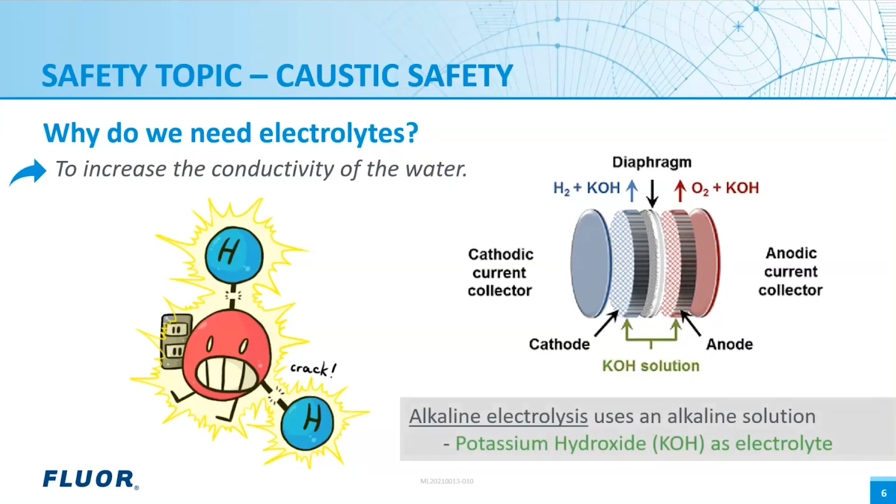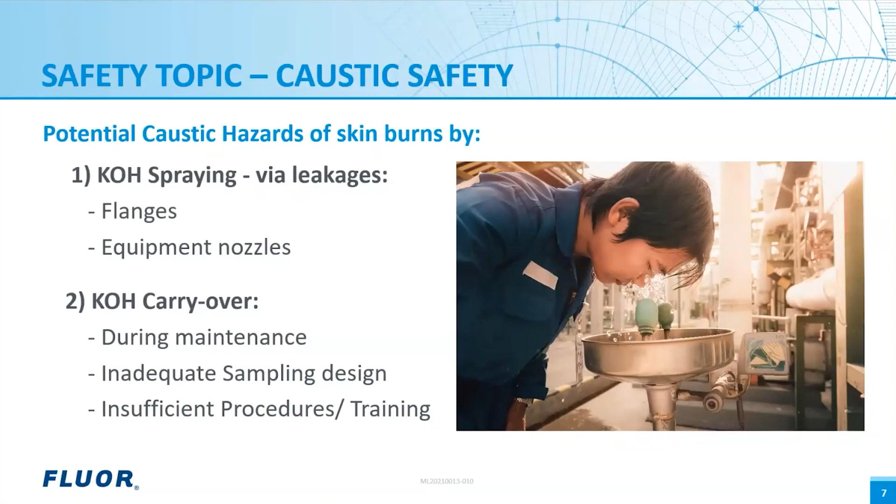I'd like to highlight some of the potential caustic hazards of skin burns, by KOH spraying via leakages from flanges and equipment nozzles. Another potential hazard is KOH carryover. This can occur during maintenance activities, inadequate sampling, and insufficient procedures and training. Caustic burns can be severe, so it requires immediate rinsing with water for at least 10 minutes and to seek medical help.

So how can we actually prevent these hazards from taking place? Some solutions are to design for maintenance, which can include easy access to equipment, adequate low point drains for proper emptying, and sufficient flush connections. We should also design for safe operation by using splash guards on flanges, having overfill protection, using level alarms, safe sampling points, safety showers with eye wash facilities, and use PPE, safety goggles, and protective clothing.

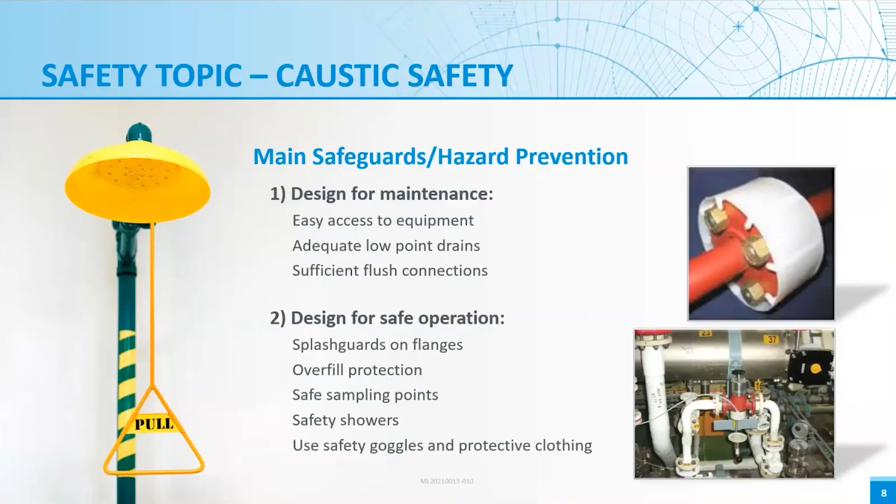Today, Javier and I are going to talk about green hydrogen, what it is, including a brief history, a look at today's market and future outlook. Then we'll get into some of the underlying electrolysis technologies, explore some of the costs, and finally look ahead to using green hydrogen at scale.

Before we get too far into what green hydrogen is, we have to ask, why green hydrogen at all? Simply put, business as usual is no longer acceptable.

This requires a radical change in the way we produce and consume energy. A multifaceted approach is required, and green hydrogen is a piece of the puzzle, especially for hard to decarbonize sectors.

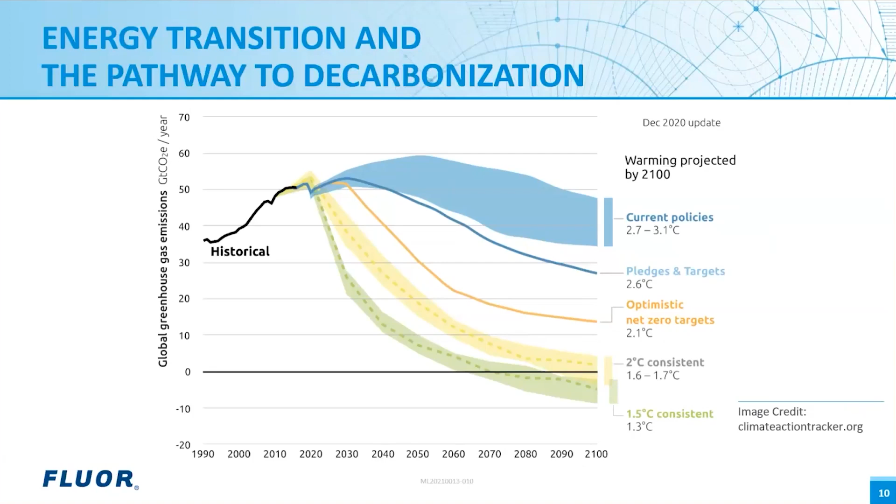While hydrogen is a colorless gas, the industry has adopted a framework of colors to describe the source of hydrogen and implicitly its carbon intensity. Most hydrogen today is produced from fossil fuels, where CO2 is emitted to the atmosphere. This is called gray hydrogen, or sometimes brown or black, depending on the type of feedstock utilized.

Blue hydrogen is also fossil-based, but utilizes carbon capture and sequestration technology to reduce total emissions. Green hydrogen most often refers to hydrogen produced by electrolysis, using renewable energy, and will be the focus of today's presentation. Hydrogen from renewable natural gas or biomass gasification is also sometimes referred to as green. Check out an upcoming Innovation Builders webinar for more information on biomass gasification.

Other colors include turquoise, pink, and even yellow, purple, or white hydrogen. By and large, though, gray, blue, and green are most commonly used.

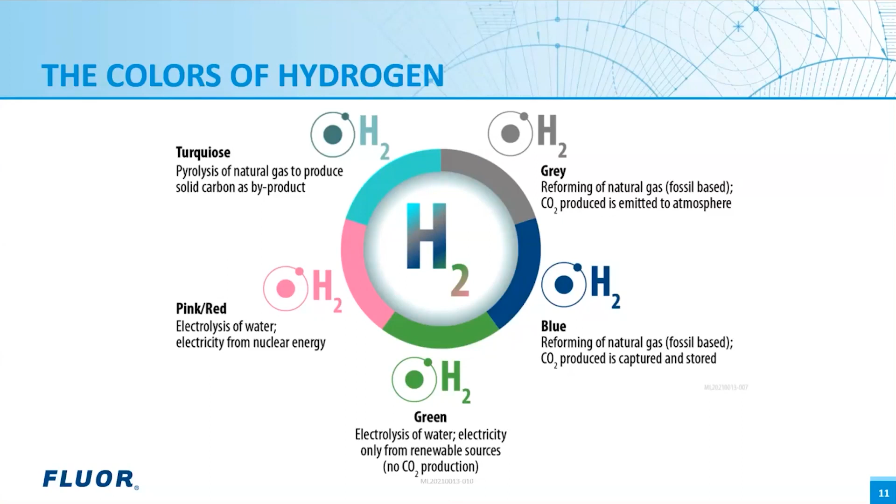Currently, the hydrogen market is a $120 billion industry. Annual global demand for pure hydrogen is approximately 75 million tons. Hydrogen mixed with other gases represents another 45 million tons of demand. Steady growth in the market has existed for several decades.

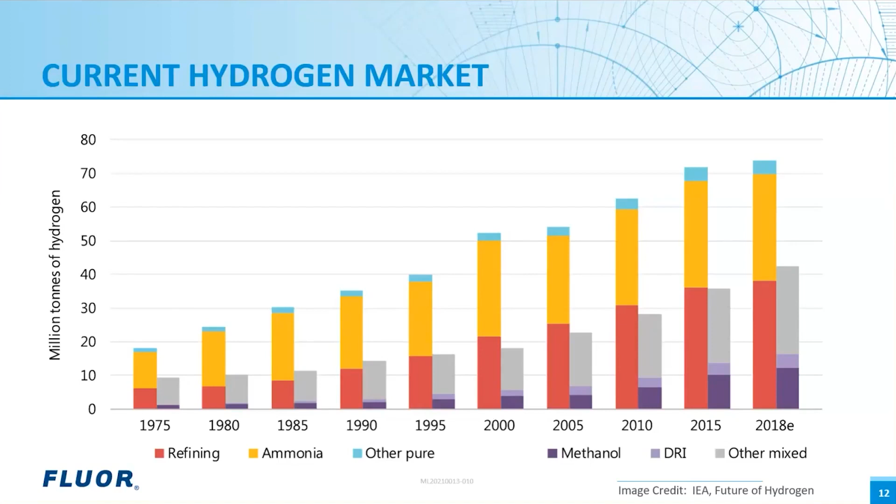Pure hydrogen growth has been driven primarily by captive users in the refining and fertilizer sectors, while hydrogen mixed with other gases has seen increased consumption for methanol production and as a byproduct fuel gas. Virtually all of this hydrogen is gray hydrogen, produced from steam reforming of natural gas or gasification of coal feedstocks.

Looking forward, production and use of gray hydrogen is expected to be displaced by a mix of blue and green hydrogen, with very little gray remaining beyond the year 2040. This is driven by hard to decarbonize sectors where it's challenging to simply decarbonize by electrification.

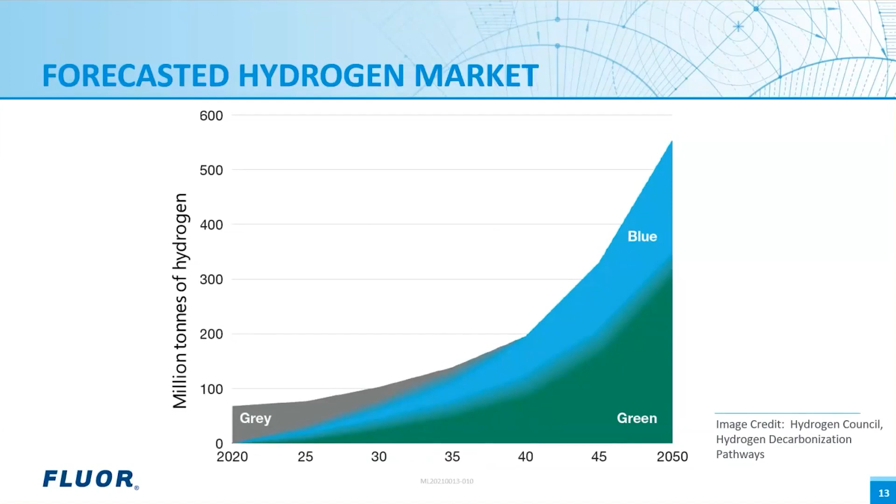Examples include existing refining and ammonia capacity, the steel industry, heavy duty and long haul shipping, aviation perhaps, seasonal power storage, and other industrial processes where CO2 can be utilized in conjunction with the produced hydrogen. The actual proportion of green versus blue hydrogen as we move towards 2050 will vary, depending on a variety of considerations, including technology cost, cost of carbon, and other regional considerations.

Now you might say, haven't I heard this before? And you'd be right. The idea of a hydrogen economy goes back to about 1970. The oil embargo in the 70s led to quite a bit of interest in alternative energy, including hydrogen. After the embargo was lifted, though, oil prices fell and interest for alternatives like hydrogen fell with it.

Then, in the 1990s, fuel cells took the spotlight, especially in the auto industry. Again, oil prices remained low and interest waned. The 2000s saw another boom and bust.

Now we are in 2021, and Wood Mackenzie has called the 2020s the decade of hydrogen. You can hardly go a day without a new project announcement around hydrogen. So what's different this time?

Certainly a strong push to limit carbon emissions from governments, industry, and individuals alike. But perhaps even more significant is the proliferation of cheap, renewable energy. Dramatic cost reductions in solar and wind are really what can turn this latest round of hype into reality.

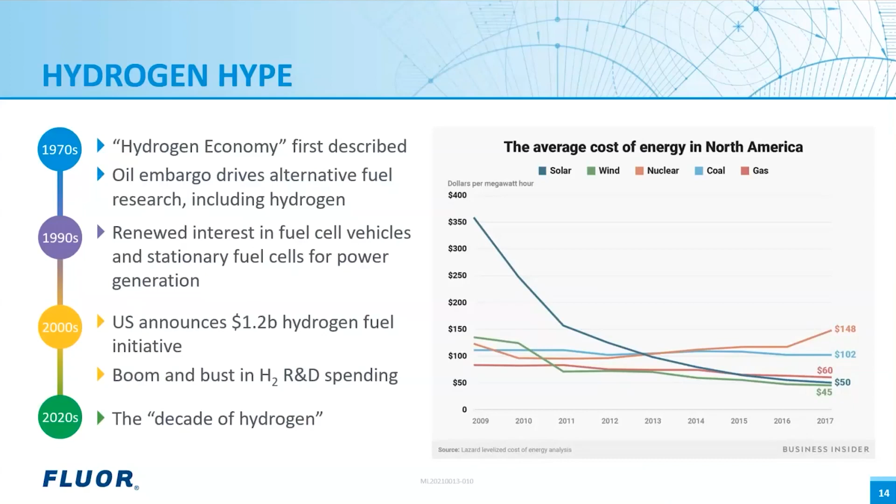As you can see from the chart, even 10 years ago, the costs of renewable energy put green hydrogen well out of reach. Today, though, wind and solar represent the majority of new electric generating capacity additions, while traditional technologies, such as coal, are seeing early plant retirements in many parts of the world.

Now that we've generally introduced green hydrogen, Javier will dive into the technology behind its production. Let's go straight into the presentation and talk about what electrolysis technology is and its long history, as well as the different types of electrolyzers available in the market.

Electrolysis is becoming more and more popular on the news. We see new announcements on a weekly basis, but electrolysis is not a new technology. It has been used for more than 100 years to perform chemical reactions using electricity as an energy source.

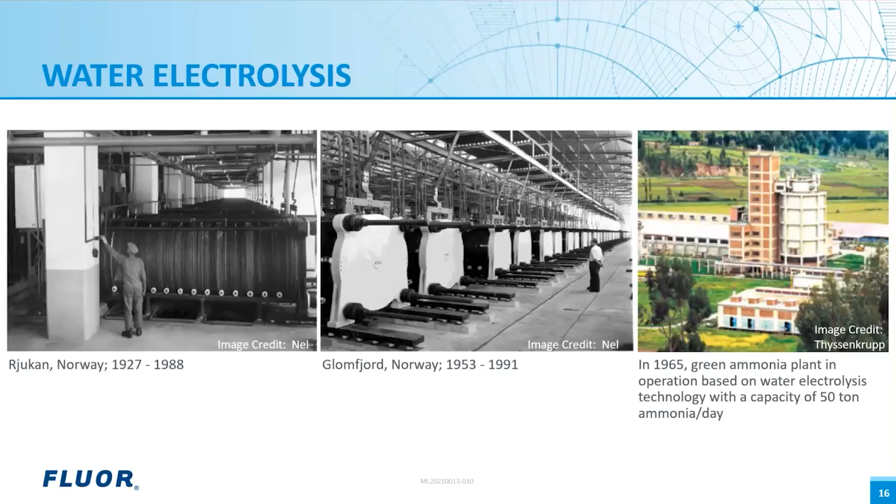Here we can see 3 examples: 2 plants producing green hydrogen in Norway that ran for 40 and 60 years, proving the strong reliability of this technology. Another example is found in Peru, producing green ammonia with a capacity of 50 tons per day, with green ammonia being one of the largest potential off-takers of new green hydrogen capacity. We can conclude that electrolysis is not a new technology, and there is plenty of experience developed over the years to ensure a successful implementation of this technology at large scale.

If there is a process where electrolysis has been widely used globally, it's in the production of chlorine, known as chlor-alkali electrolysis technology, in operation for more than 100 years with plants all over the world. This technology is the sister of alkaline water electrolysis for hydrogen production, and there are many similarities between the two, which will help speed up the implementation of water electrolysis at large scale. On the left-hand side, you can see an electrolytic membrane cell.

This technology works as follows: a high concentration solution of sodium chloride in water is fed into the electrolysis cell, and then by applying a current, sodium chloride is split into chlorine, hydrogen, and sodium hydroxide.

Here we can see an example of a chlorine plant in the UK producing roughly 400 kilotons of chlorine a year, which is equivalent to 125 megawatt capacity. Fluor has executed chlor-alkali plants across the globe, and this plant is one of them.

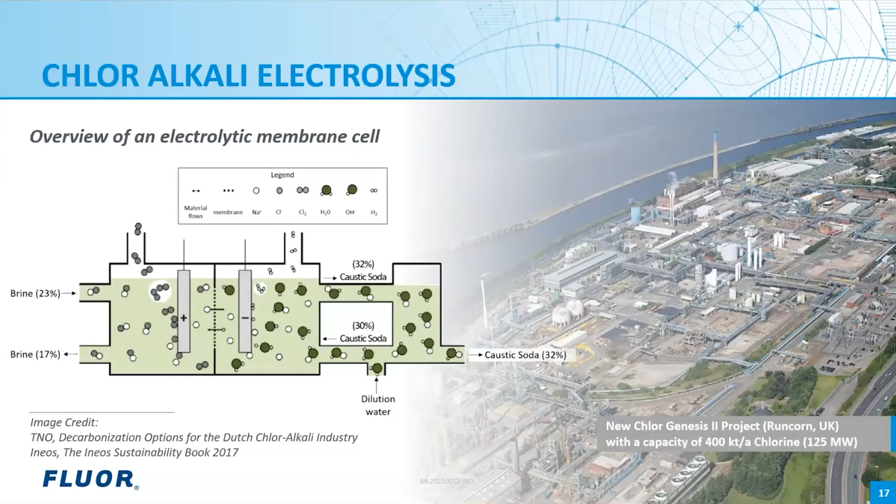Now let's figure out how we can produce hydrogen using water electrolysis technology. In this diagram, you can identify the main elements of a water electrolysis plant, including the power generation from wind, solar, or other renewable sources, as well as the electrical equipment required to get the power at the right conditions for the electrolyzer cells. Then we have the feed water supply, which is the main raw material together with electricity.

Ultra-pure demineralized water quality is required to run the electrolysis unit, with preferred electrical conductivity of 1 microsiemens per centimeter. Alkaline technology can handle water with higher conductivity values, up to 5 microsiemens per centimeter, compared to proton exchange membrane technology that has more stringent water quality requirements of 0.1 microsiemens per centimeter.

Here we have the electrolyzer stack. This is the heart of the plant, where the reaction takes place splitting water into hydrogen and oxygen. Let's take a moment to understand what the term stack means: a stack is a combination of multiple cells, like the one we have seen for chlor-alkali technology, all placed together in series within a frame.

On the right-hand side, we see an example of a stack for proton exchange membrane technology. The top image shows two cells, each composed of a membrane and two electrodes. We also find a bipolar plate in combination with a porous transport layer used to separate each of the cells. At the ends, we have the end plates, which are important to avoid leakage and collect the outgoing fluids. The bottom image displays two stacks for proton exchange membrane technology from the British company ITM Power.

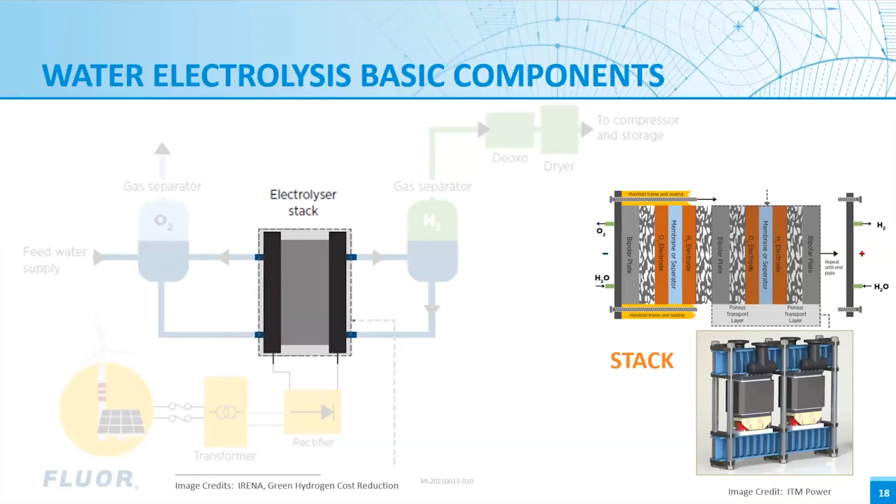Back to the main process, we have the downstream equipment required to produce hydrogen at very high purities of 99.99%. As part of the purification section, there is a separation step to remove the condensate formed after the hydrogen stream is cooled down, which is then followed by a deoxidation step to remove oxygen contaminants, and a final drying step to remove the free water still present in the hydrogen stream.

Additionally, depending on the type of technology, you might need a compression step to get the hydrogen to the right supply pressure.

There are four main electrolysis technologies, all similar in some ways, but unique in others. Each has an anode and cathode separated by a membrane or diaphragm. The overall chemical reaction is the same, but different ions participate in the half reactions occurring at the anode and the cathode. Alkaline has the longest history of industrial operation, while proton exchange membrane is a newer alternative.

Both of these technologies, though, have sufficient operating experience to be considered mature and reliable options. Solid oxide and anion exchange membrane technologies are much newer options, with limited commercial experience. As such, these are still considered developing technologies. Next, we'll take a little deeper look at each of these.

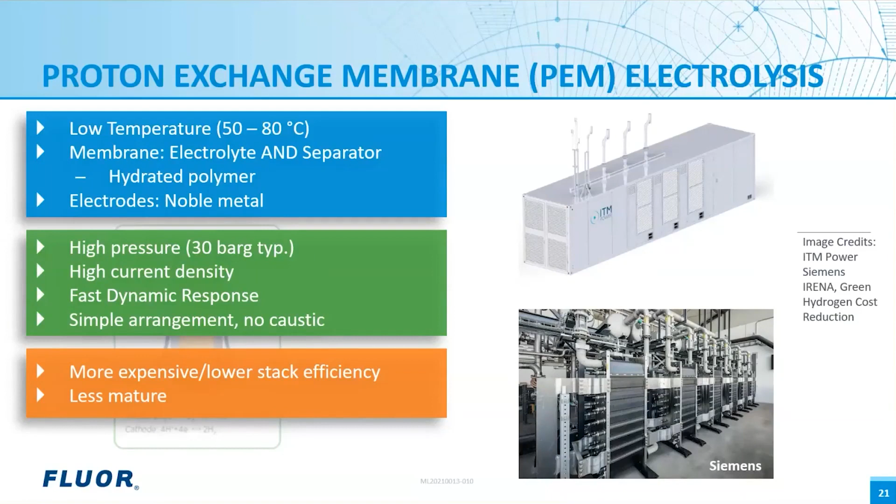Additionally, while PEM is a commercial technology with a long history, there is less experience than alkaline and its related forerunners. In contrast to alkaline and PEM technologies, solid oxide electrolysis, or SOEC, operates at very high temperature.

For this reason, it is sometimes referred to as high-temperature steam electrolysis. Similar to PEM, there's no electrolyte solution. The membrane is a ceramic oxide and acts as both the electrolyte and the gas separator. Here, oxygen ions migrate across the membrane.

The electrodes are typically a metal ceramic material for the hydrogen side and a perovskite type, such as lanthanum, strontium, cobalt, ferrite for the oxygen side. The thermodynamics of water electrolysis allows for lower electrical input at higher temperature. This leads to high efficiency. A portion of the reaction energy can be supplied thermally rather than electrically, making it a good fit for use in industrial applications with waste heat.

Solid oxide electrolysis cells have another interesting and unique feature. These systems can also electrolyze carbon dioxide to produce carbon monoxide, or electrolyze carbon dioxide and water together to produce syngas. This has some important implications as we look for ways to utilize CO2 captured from existing processes and think about how a circular economy might work.

Like many things though, while high temperature opens some doors, it creates its own challenges when we look at things like thermal cycling of the unit. Most importantly though, is that there's limited commercial experience. We expect the next 10 years to be an exciting time for this technology as it transitions from the demonstration level into full commercial status.

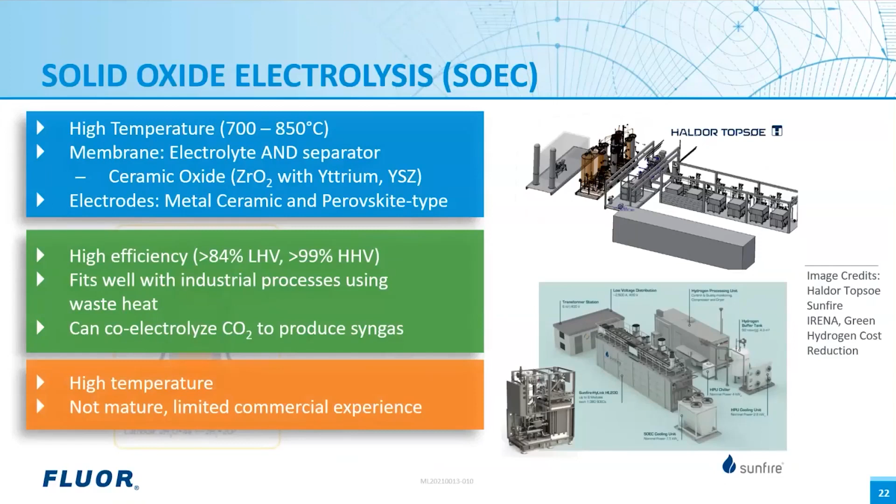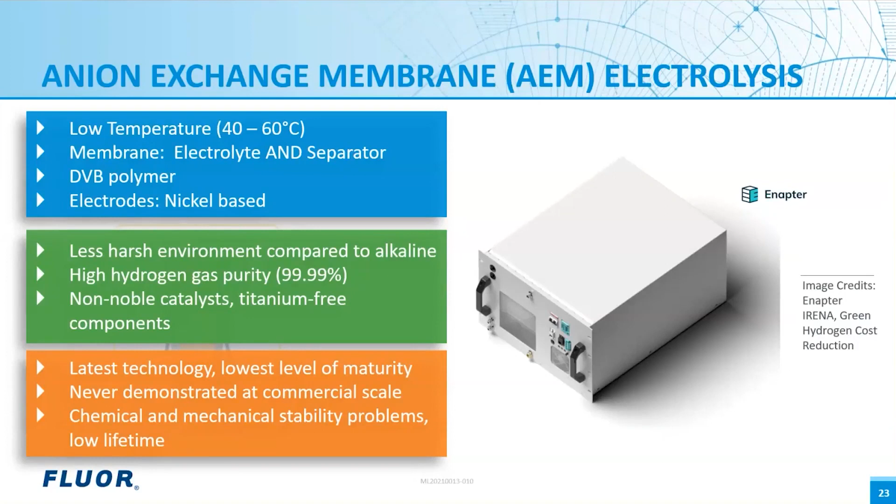Now we will discuss the current global electrolysis capacity, what the expected capacity might be for the future, and the cost involved in producing green hydrogen.

Let's talk about how the electrolysis capacity has evolved over the last 10 years and what the expected increase in capacity looks like in the coming 10 years. Although we see announcements of hundreds of megawatts or even gigawatt scale plants, like the one in NEOM in Saudi Arabia, we should be aware that the current global electrolysis capacity is rather limited, with over 110 megawatts having 60% of that capacity installed in Europe.

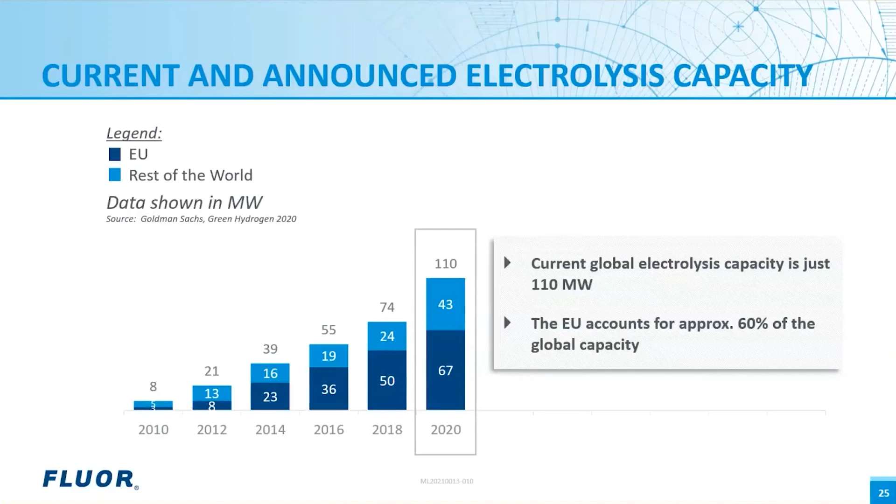If we look forward at the expected capacity increase in the coming 10 years, the picture is totally different. Goldman Sachs estimates that the installed capacity by 2030 will be 33 gigawatts, and that is only accounting for the announced projects by summer 2020. How many new projects will soon be announced, especially considering that the European Union green hydrogen target is 40 gigawatts by 2030? We don't know for sure, but something we certainly know is that green hydrogen capacity is going to increase drastically in this decade.

To give the audience a concrete figure, 33 gigawatts of capacity is equivalent to producing 5 million tons of hydrogen, which is about 7% of the current global pure hydrogen capacity.

Let's now try to understand the cost of green hydrogen. Probably this is one of the most discussed topics when thinking about green hydrogen, and that is the production cost. In the next 2 slides, I will discuss the CAPEX and the OPEX elements of green hydrogen facilities.

When we compare the electrolysis system CAPEX, there are certainly 3 figures accepted in the industry: $750 per kilowatt of electrolysis capacity for alkaline technology, $1,000 per kilowatt for PEM technology, and $2,800 per kilowatt for solid oxide technology. There is no significant difference between alkaline and PEM, but we can conclude that alkaline is more cost-effective than PEM for large-scale facilities. Solid oxide technology is simply too costly now for large-scale installations.

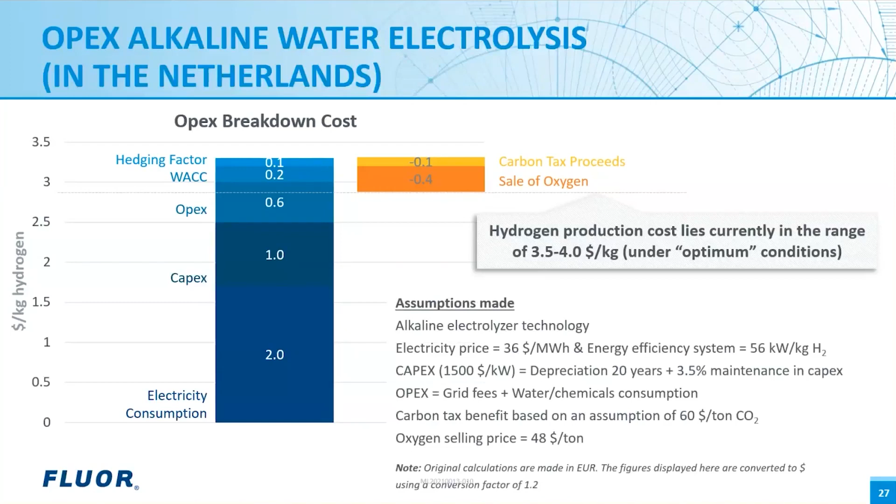Here, I wanted to show you the assumptions made in our model, highlighting the most important, the electricity price of $36 per megawatt hour. Here, there is a lot to discuss. For example, what is the optimum operating time of an electrolysis plant to get the cheapest hydrogen production cost? Because wind and sun are not always available. There are some studies claiming that the optimum is found around 4,000 hours a year, using electricity when it can be purchased at the lowest price.

Now that we understand the different cost elements involved in green hydrogen production, let's take a quick look at the projections published by two well-known organizations, the Hydrogen Council and Goldman Sachs. The Hydrogen Council expects that green hydrogen will catch up with gray hydrogen first, potentially somewhere between 2030 and 2035, driven by the increase in CO2 carbon tax, driving the gray hydrogen production cost up over time. Then green hydrogen will catch up with blue hydrogen by 2050, if we consider the worst-case scenario.

Goldman Sachs estimates that green hydrogen will only catch up with blue hydrogen at normalized gas prices, an average of gas prices over time, not at current low gas prices. This will only happen by 2050 if green hydrogen is produced using solar power, currently the cheapest source of electricity. The purpose of this slide is to show that there are many reports out there, and the outcome always differs depending on the assumptions made.

These values are not set in stone. They are estimations, and only time will tell when green hydrogen will become cost competitive with gray and blue hydrogen.

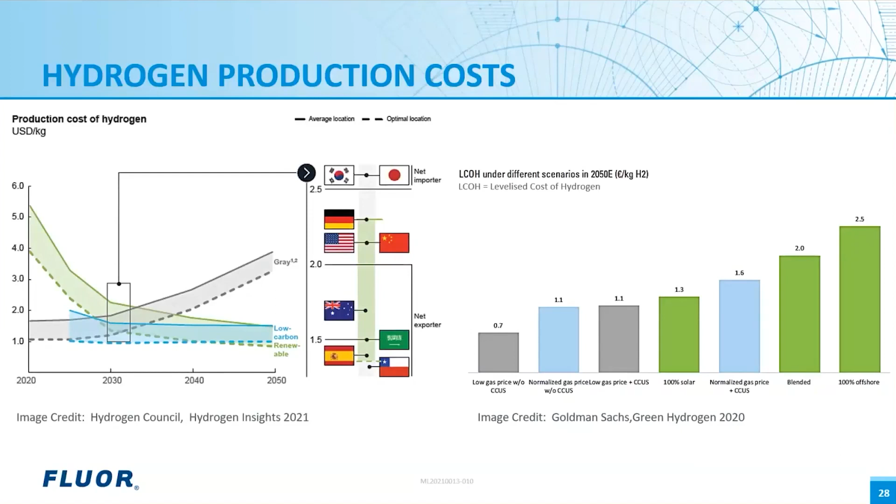We wanted to talk about the main aspects to consider when building large-scale electrolysis plants, the available options to store and transport hydrogen, using nuclear power to fuel electrolyzers, and some interesting projects happening within Fluor.

The first one is location. Will it be a new facility or integrating within an existing one? Will the plant be close to the renewable power generation or close to the hydrogen off-takers to reduce transportation costs? If a constant supply of hydrogen is required downstream, is there availability of existing hydrogen backup, either by gray or blue hydrogen?

The second one is power generation. Will the power be generated from solar, wind, hydro, nuclear, or potentially a hybrid system? By nature, wind and solar power generation is intermittent, and typically operating hours lie in the range of 3,000 to 5,000 hours for plants connected directly to wind or solar farms. Will the plant be connected to the grid, not always knowing if the power comes from renewable sources? Or will it be connected directly to a wind or solar farm, only operating when the wind is blowing or the sun is shining?

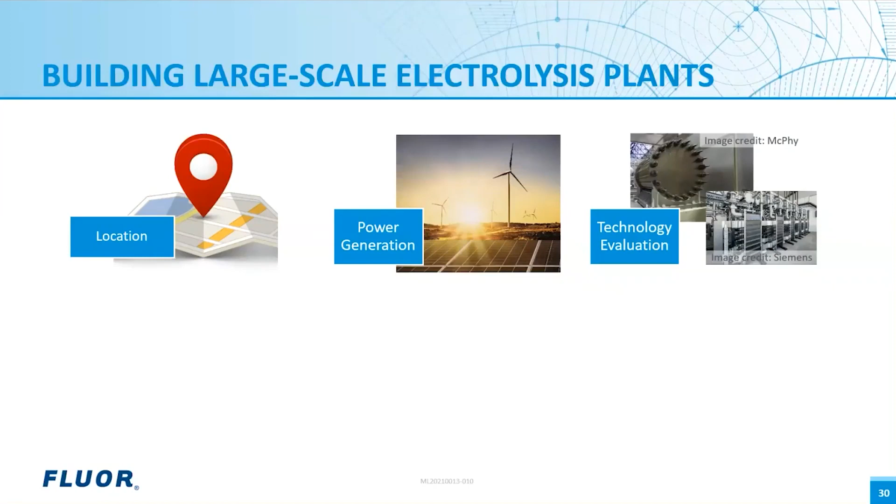The third one is technology evaluation. Here we need to consider factors such as technology cost, project financing, and how to reduce risk for funding, perhaps creating strategic partnerships to make the project bankable. Other aspects are technology performance in terms of maturity, reliability, and energy efficiency, as well as the plot space required, the lifetime of the stack, how often it needs to be replaced, and other maintenance requirements to run the plant.

The fourth consideration is the hydrogen itself. Will it be used locally, or exported elsewhere? Will it be sold as such, or further converted into ammonia, methanol, or other fuels? If hydrogen needs to be transported, which of the multiple available options will be considered? I will briefly discuss this topic in the next slide.

The fifth one is plant design. Will the plant be built as a standardized design, or does it need to be customized, for example to operate at higher pressure? Last but not least, this technology requires large amounts of water, so water availability needs to be assessed. Is there a good quality water source available nearby, or is a desalination plant required to get sufficient water?

These are the six considerations to be carefully evaluated at an early stage when building large-scale electrolysis facilities.

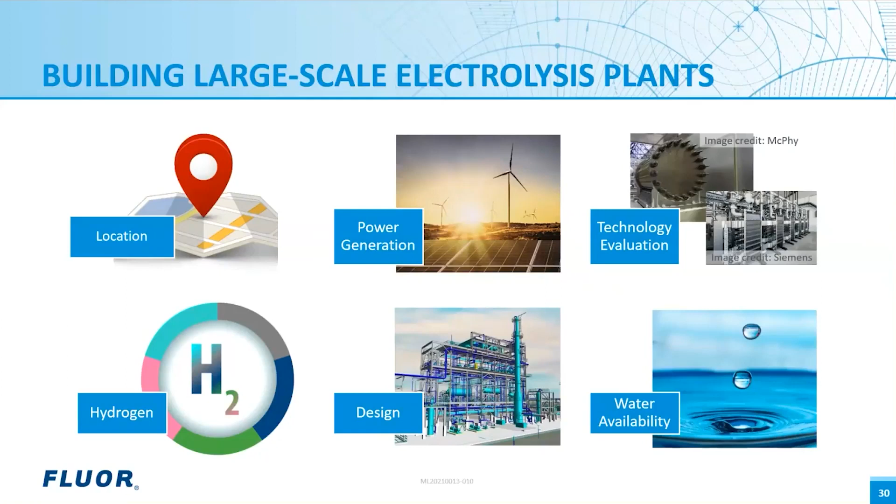In this presentation, we also wanted to touch on hydrogen storage and transport, although this could be a topic for a separate webinar by itself. When transporting or storing hydrogen, there are a number of possibilities to be evaluated. Here I will briefly mention the different options.

We can transport hydrogen using existing gas pipelines with minor modifications. There are many studies currently looking at this. The main conclusion is that hydrogen can be blended with natural gas in existing pipelines, up to 15 to 20 volume percentage, easily helping to reduce carbon emissions. Above that threshold, major modifications are required.

We can store hydrogen as liquid hydrogen at cryogenic conditions, minus 253 degrees C. We can also store hydrogen as compressed gas in the range of 200 up to 700 bar.

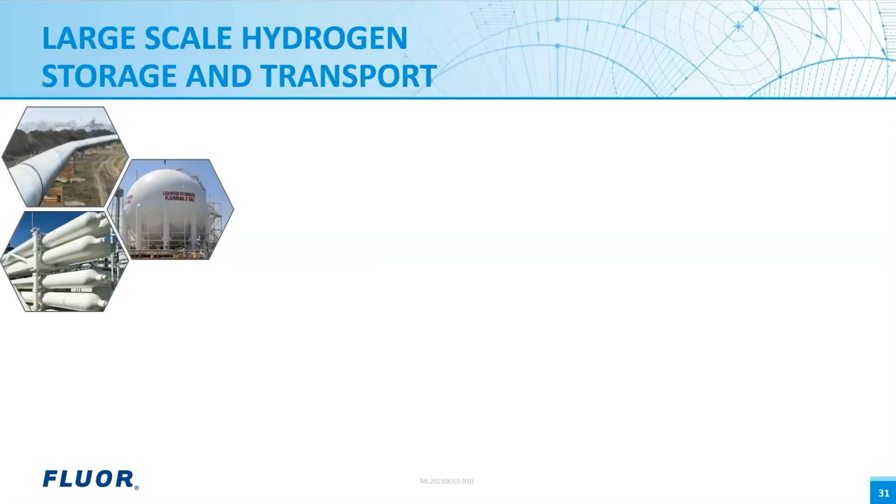Here are more options. We can store and transport hydrogen as part of an organic molecule, known as liquid organic hydrogen carrier. Basically, an organic molecule is hydrogenated at the hydrogen production site. Then the hydrogenated molecule, in liquid form, is transported using existing gasoline or diesel infrastructure. Finally, the molecule is dehydrogenated at the hydrogen off-taker site, sending the liquid organic carrier back to the hydrogenation facility. We can follow a similar approach by producing methanol or ammonia.

Salt caverns can also be used to store hydrogen, with many studies currently investigating this concept.

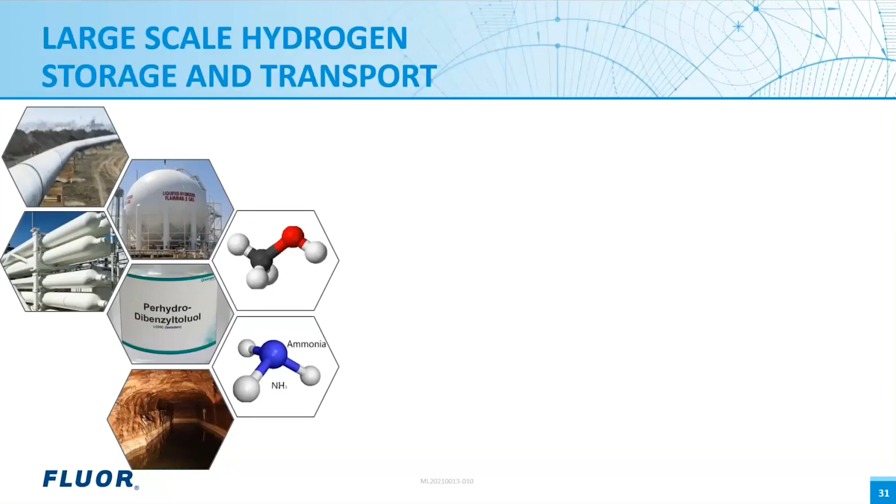Producing green hydrogen via electrolysis will take an enormous amount of clean power. To replace current pure hydrogen demand of approximately 75 million tons per year, without consideration for emerging markets or growth, requires an annual power input on par with the total annual power demand for all of Europe. This is roughly 2,200 gigawatts of solar PV capacity or 1,300 gigawatts of wind. As perspective, the current global operating capacity for solar PV and wind are each around 750 gigawatts. Looking ahead to 2050, with potential hydrogen demands over 500 million tons per year, the power requirements are now on the scale of the annual global power consumption we have today.

While solar and wind additions are robust and will play a major role in the energy transition, there are still some fundamental challenges that remain. Low capacity factors necessitate large installed electrical generation capacity, but also increase the installed electrolysis capacity required, unless battery storage is used to level out the renewable generation. Considering these things, proponents of nuclear energy see a natural fit with hydrogen, even more so if high-temperature steam electrolysis technologies such as solid oxide are successfully deployed. And while nuclear-based hydrogen has claimed pink as its hydrogen color of choice, from a carbon intensity perspective, we are really still talking about green hydrogen. With this approach, a base load of large-scale hydrogen could be produced with a fraction of the land usage.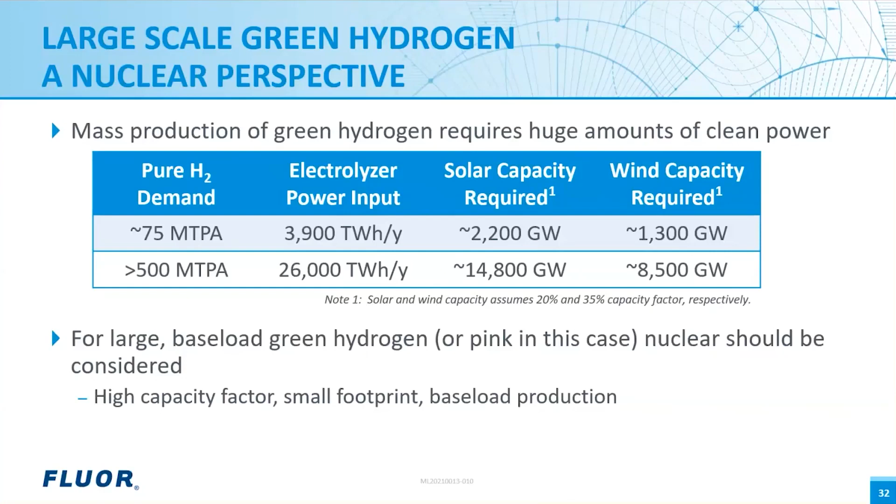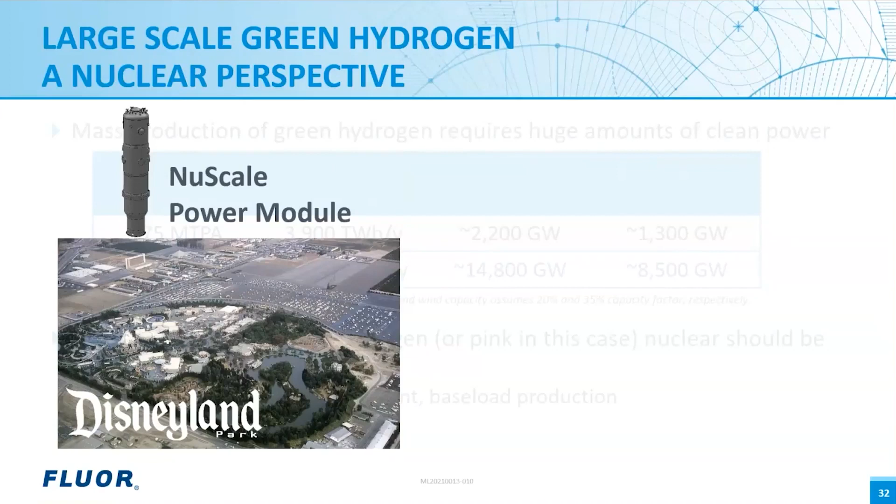Studies on the NuScale small modular nuclear reactor being developed by Fluor indicate required land use is close to 500 times less compared to solar PV. Putting it into perspective, a nominally 1,000 megawatt NuScale facility would fit comfortably on the Disneyland Park property located near Los Angeles in the city of Anaheim. Meanwhile, considering the low capacity factor and its distributed nature, a solar-based system producing the same amount of hydrogen would need to cover the entire city of Anaheim.

Shifting gears from very large to very small, I wanted to highlight an exciting demonstration project Fluor is involved in. California has long been a leader when it comes to clean energy, including green hydrogen. In addition to the growing network of hydrogen fueling stations in the state, we see industry stepping forward as well. SoCalGas is the United States' largest natural gas distribution utility and has committed to net zero emissions in operations and delivery of energy by 2045.

Fluor is supporting SoCalGas on multiple fronts. One of these projects is called the H2 Hydrogen Home, which will showcase the role hydrogen must play in attaining California's goal of carbon neutrality. The project will include solar panels, an electrolyzer, a battery energy storage system, hydrogen storage, and a hydrogen fuel cell integrated together into a microgrid for the home. The demonstration will convert solar energy into clean hydrogen, which can be stored, blended into the natural gas supply, and used in the fuel cell for the home's electricity use. Any excess energy will then be exported to an existing SoCalGas commercial facility, further offsetting grid power.

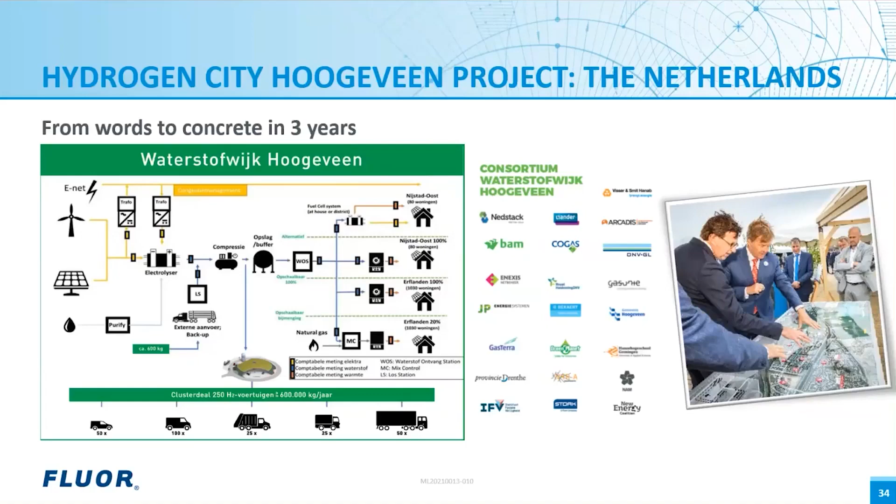Hydrogen is important and will play a key role in hard to decarbonize sectors, such as heavy-duty transportation or high-temperature operation in industry. Electrolysis is not a new technology, but its application for on-purpose hydrogen production and gigawatt-scale implementation is new.

Electrolysis capacity will expand rapidly over this decade, from 100 plus megawatt to many gigawatt by 2030. Alkaline generally shows the lowest CAPEX and OPEX, especially for large baseload plants, but PEM technology is not far behind, and it has its own advantages.

Whether large or small scale, Fluor has the right skill set to manage and implement not only water electrolysis plants, but also hydrogen logistics, infrastructure, and compression stations in greenfield or brownfield applications.

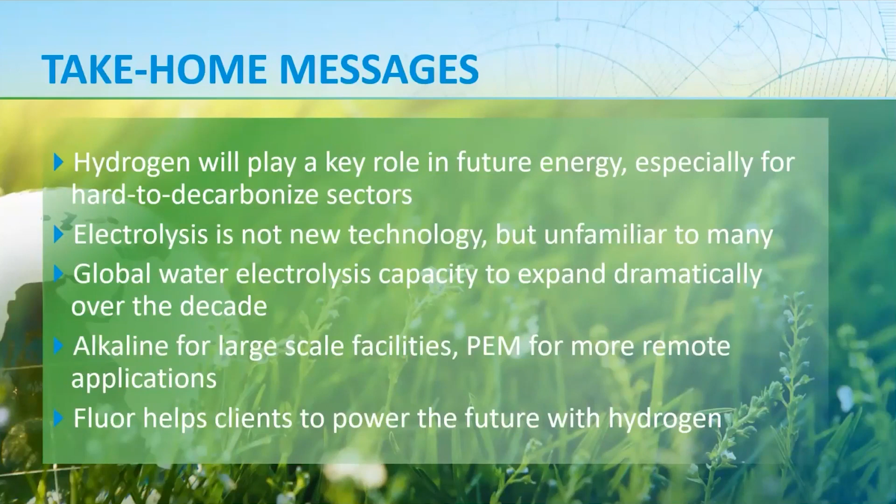The first question is, can the lack of availability of water be a problem in the future? And what quality of water is needed?

Yeah, I will take that question. So, indeed, studying the availability of a water source nearby is extremely important, although building pipelines to transport water is relatively cheap. And for running water electrolysis plants, you need ultra pure demineralized water quality. This is very important to avoid the elements of the stack deteriorating too fast. Depending on the type of water you have, if you have tap water, you will need a pretreatment step such as ion exchange, also known as electrodeionization. And if you have seawater nearby, you will need a different type of pretreatment, such as reverse osmosis, to ensure that the electrical conductivity of the water is in the range of 1 microsiemens per centimeter for alkaline technology. And for PEM technology, you will need to go even deeper, to 0.1 microsiemens per centimeter.

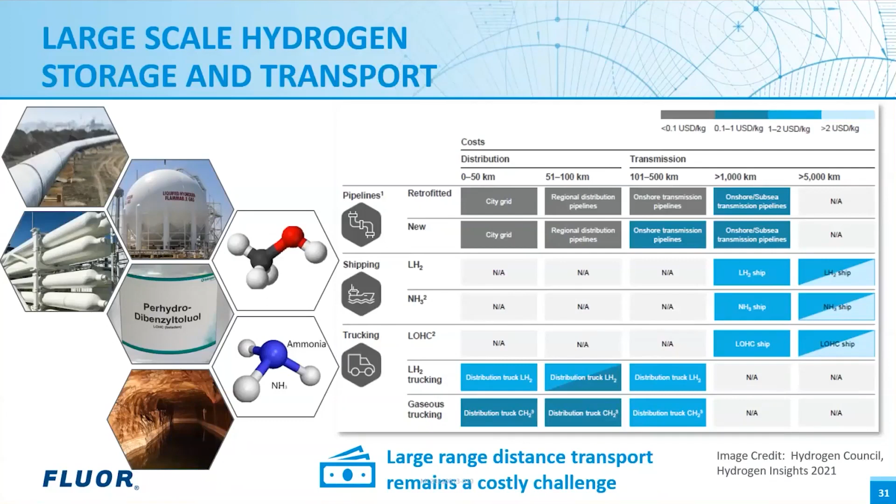I can take a stab at that. Think of hydrogen, we like to talk about hydrogen in kilograms, and 1 kilogram of hydrogen is roughly equivalent to 1 gallon of gas in terms of its energy content. So you can make that connection there. The cost depends on what you're using it for. We kind of think of a willingness to pay for different markets. If you're using hydrogen as fuel gas, then it's going to have a fuel value, right, and the cost demand is going to be very low. We don't want to pay a lot for fuel gas. Whereas if we're looking at chemical feedstocks, maybe it's a little more. Transportation fuels, maybe a little more even. So more near term, you're looking at costs being able to displace maybe diesel fuels and things like that. But we really need to see over the coming decade the CAPEX drop, and the OPEX continue to drop, so that we can be a little more competitive in more markets.

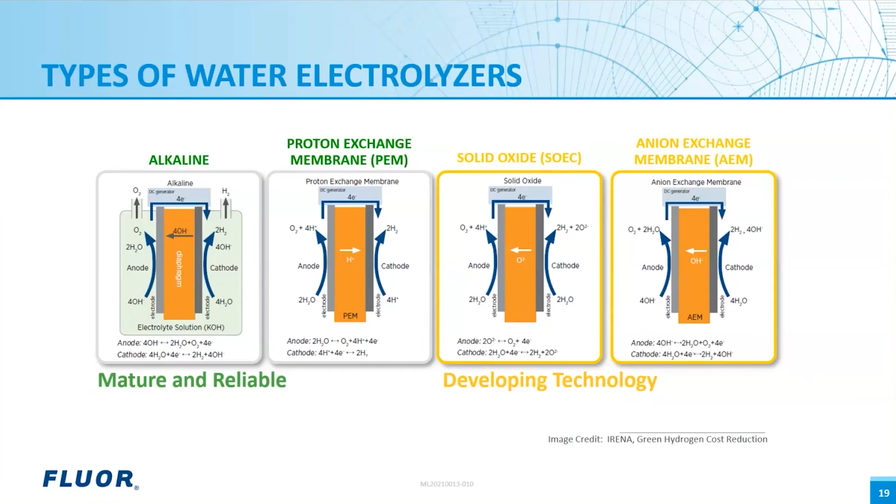I think the biggest challenge is getting the technology implemented at a large scale. We've seen many announcements to build gigawatt scale facilities, but we don't have experience with this kind of scale globally. The largest plant currently is in the range of 20 megawatts. So we really need to work on the challenges of getting to gigawatt scale, and that will definitely help reduce the cost of this technology over the coming decade. Getting these plants to a much larger scale will help reduce the cost.

I would add that vertical integration is going to be a challenge as well, just from a cultural point of view. Many companies are used to working within their slice of the supply chain. To make green hydrogen a reality, I think we're going to see a lot more vertical integration, where power generation, hydrogen production, and the users—especially in industrial applications—are more together than they have been in the past.

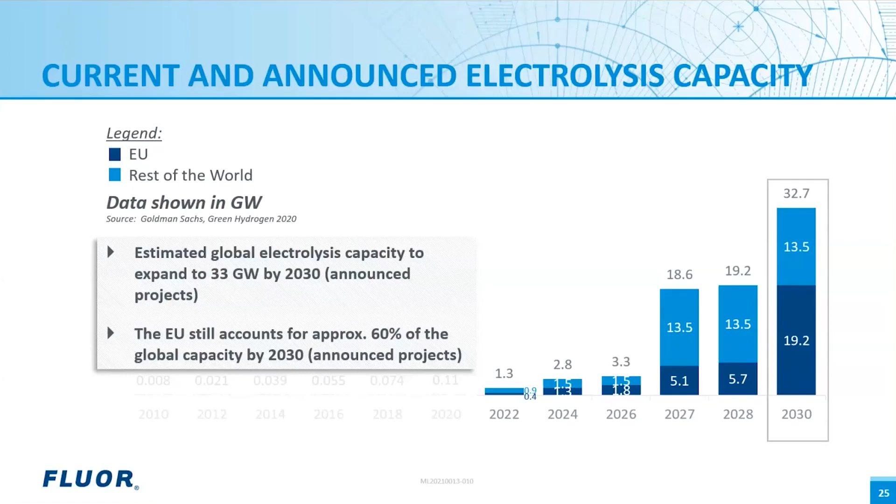Thank you. So this one's for Patrick. Considering the main end users of hydrogen will be cars, planes, and power generation, are there policies in North America in place to allow this? And have these end user companies already invested in hydrogen technology?

Transportation is certainly expected to be a big chunk of the demand. There's differing opinions on which areas of transportation will benefit most. So far, the biggest foothold, maybe a small one, is that there are quite a few hydrogen forklifts out there, especially in North America, but around the world as well. As for policies supporting that, it's very regional at this point. I talked a little bit about California—California has put a lot of money into developing hydrogen fueling infrastructure, and the number of stations popping up shows that. There are other regions with similar things going on, but so far it's a bit patchy. I think moving forward, as more governments talk about the cost of carbon, carbon taxes, or carbon border adjustments—whatever method of costing carbon you want to look at—those policies will support further development of some of these technologies.

Thank you. Another question: do you see any problems related to safety when hydrogen is used? It's a small gas, leaks easily, and when it comes into contact with air it can undergo an explosive reaction. So how are we looking at solving this?

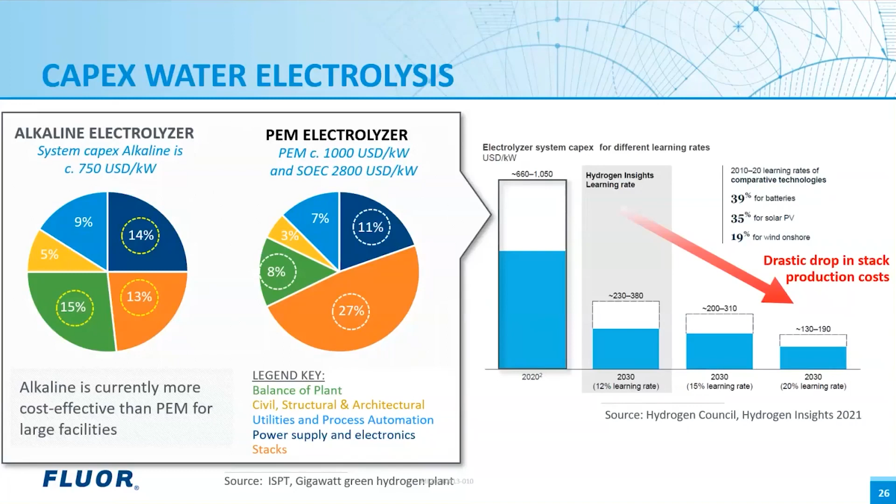Yeah, I mean, certainly the concept is that it's a demonstration and a model for the future. From a gas company's perspective, selling methane in a world where we don't like carbon anymore is certainly a challenge. And we have to meet people's energy needs, right? No matter how good we feel about the environment, it's going to be hard for people to set down their iPhones and their computers and things like that.

So the question is, how do we make this energy transition robust without sacrificing major quality of life? So yes, it's intended to be a demonstration, but looking forward, how does this apply to greater communities? With this project in particular, the idea is, what does it look like maybe in a condominium complex or a retirement community, where just like you have a clubhouse or a central pool that everyone shares, maybe you have a central solar system and central hydrogen system that services a small community. So those are kind of the thoughts that are going on. Yeah, it's pretty fascinating, exciting for the future.

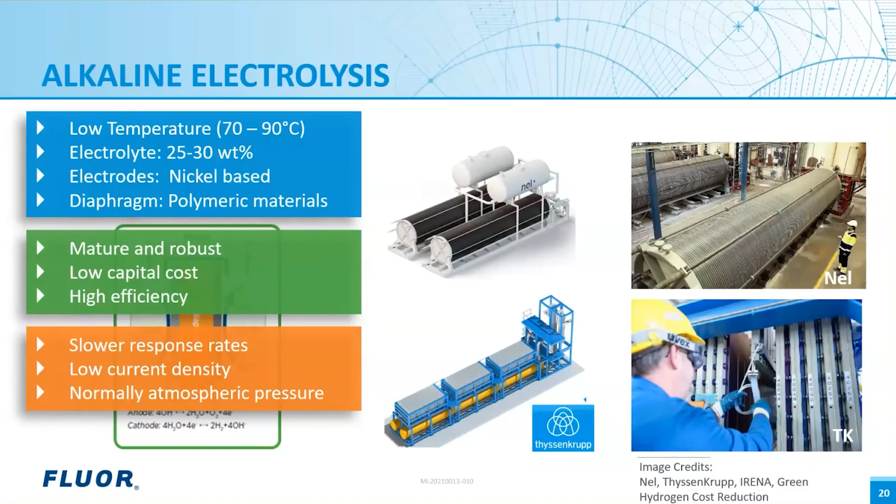Another considered byproduct is oxygen. So each kilo of hydrogen that you produce roughly results in about 7.5 to 8 kilos of oxygen. So you can call it a byproduct, but there are certain industries that will be happy to take that, such as the steel industry. I'm looking further down the line.

Yeah, you will also have some wastewater that will come out of your process, that you need to find a processing facility for. Besides that, you have waste heat, if you can call it a byproduct, but that's also something that you can look into integrating into district heating.

Yeah, speaking about alkaline specifically, I think Javier touched on all of them, but probably the key one that requires some degree of management is the alkaline solution, which does have to be changed on some periodic basis.